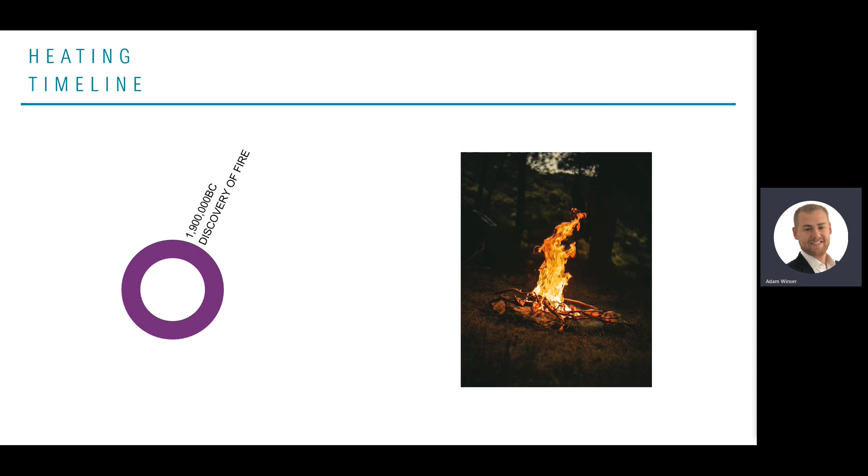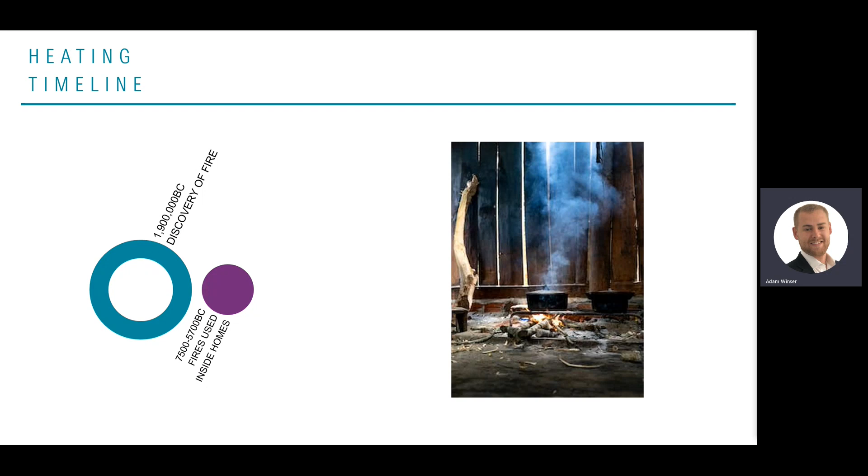Heating all started with the discovery of fire over 1.9 million years ago. It is then believed that fires moved indoors for heating between 7,500 to 5,700 BC. A major breakthrough in the timeline of heating was the concept of central heating, which is where one central heat source is able to heat an entire building. This concept is first believed to have been developed in ancient Korea and was later developed by the Romans.

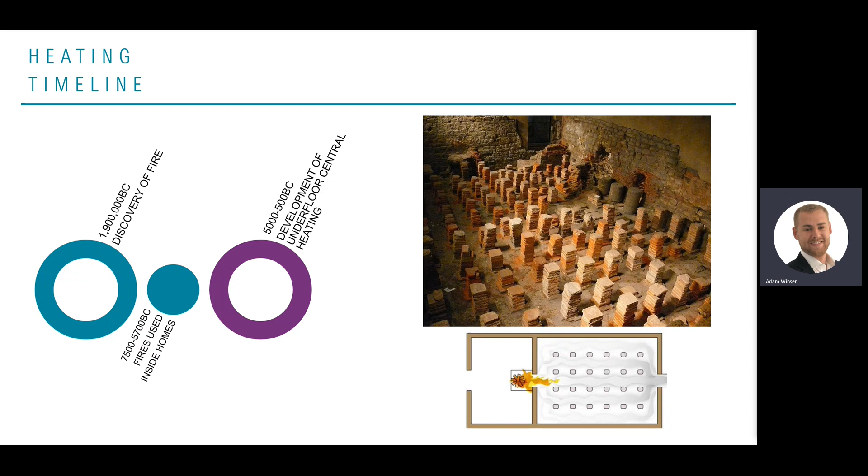As we can see here, the buildings were raised on plinths to allow for warm air from a fire to circulate under the building, heating the whole floor as a result. After the fall of the Roman Empire, very little development was made in heating. Central heating was practically forgotten and people returned to fires for heating.

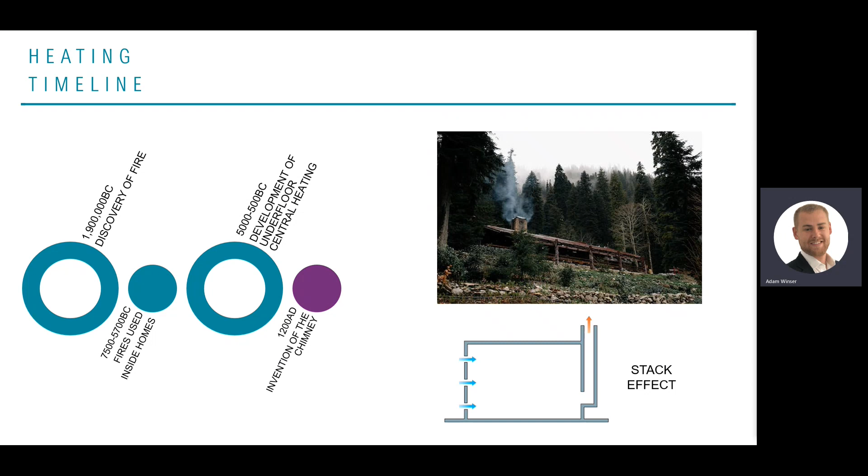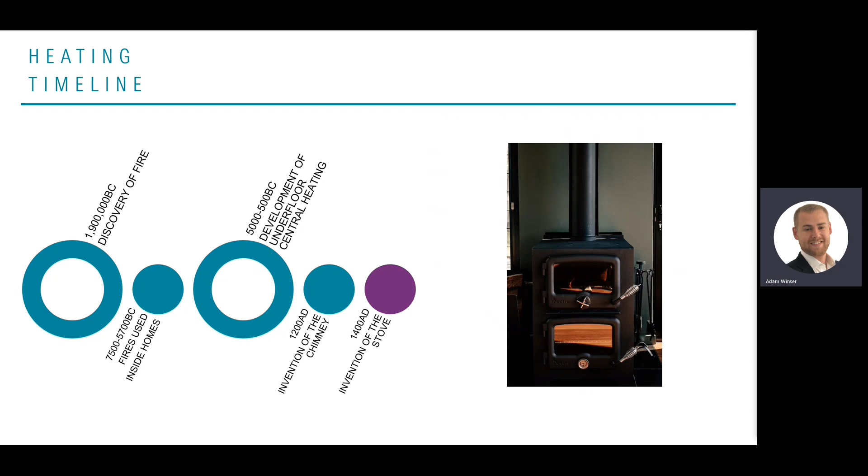In the year 1200, the chimney was invented, which now enabled smoke to be removed from properties, as well as improving the output of fires through a constant airflow known as the stack effect, which is continuously driven by buoyancy. Next came the invention of the stove approximately 200 years later, which improved the controllability of wood burning and allowed for heating to internal rooms away from the chimney.

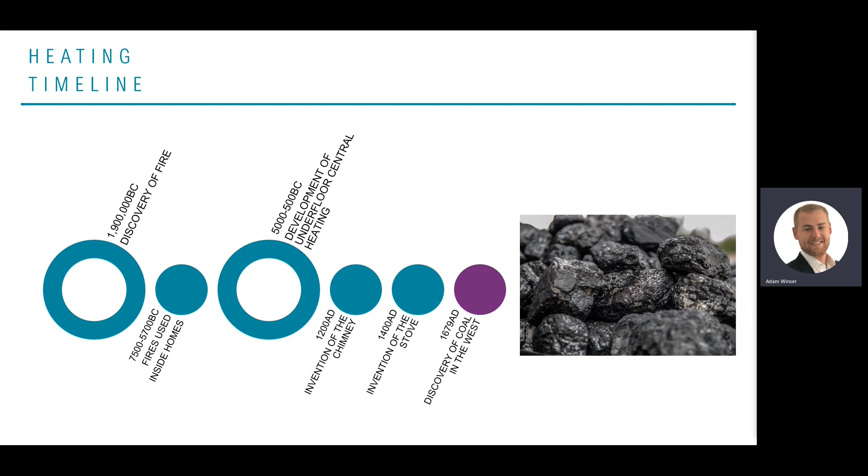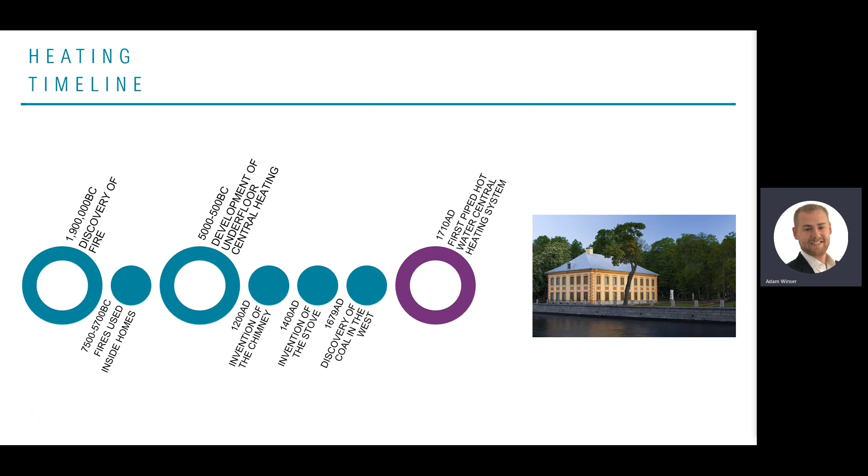Coal was discovered in the West in 1679, which offered a cheaper alternative to wood as a source of fuel. At the time, global warming was unknown, and therefore the severe consequences of burning coal were sadly not understood. The first water-based central heating system was installed in 1710 using an adjacent river. Central heating then developed further by the invention of a domestic steam boiler in 1790 that circulated hot steam around pipework.

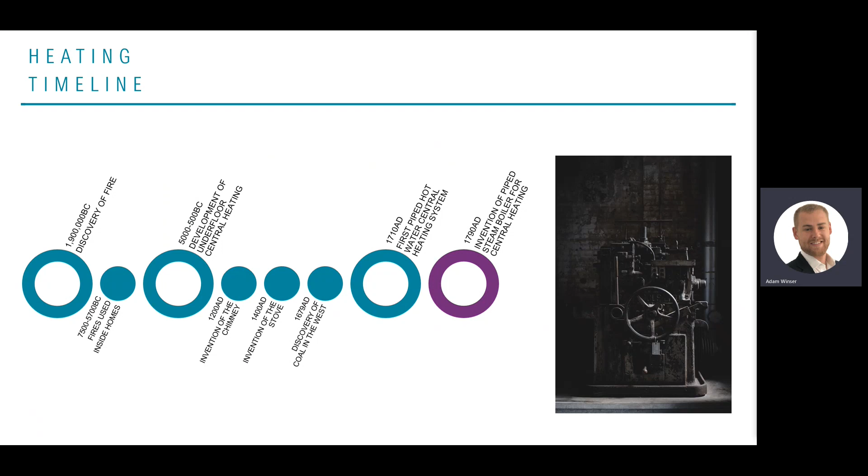Next came the development of the gas-fired stove in 1802 for both heating and cooking. This invention paved the way for gas to be used as the primary heating fuel, with over 80% of UK homes today running on gas.

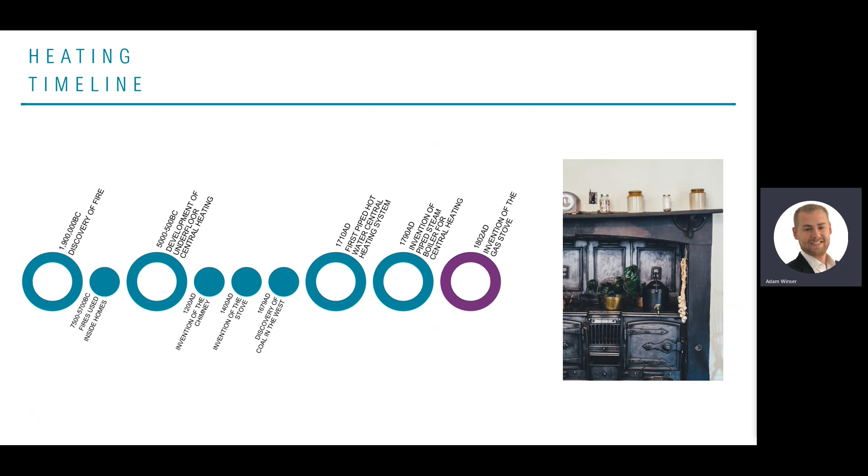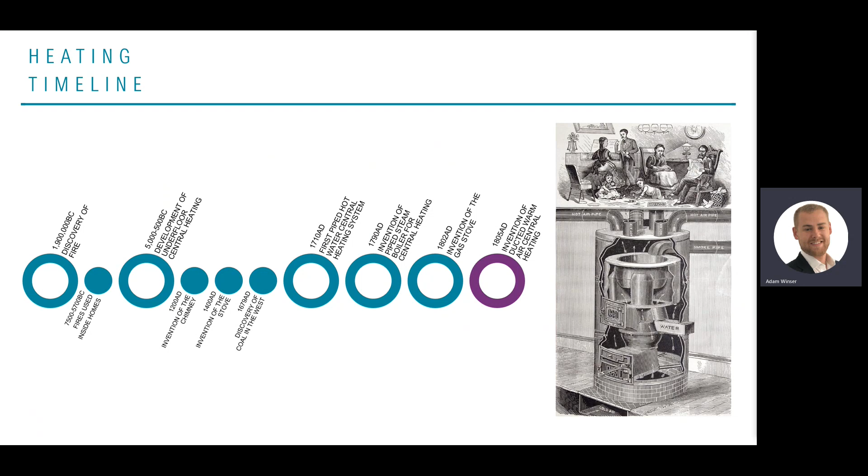In 1805, ducted warm air central heating was invented, which drew on the earlier concept of underfloor warm air heating. The addition of the ducts and floor grills allowed for warm air to be delivered directly into habitable spaces of a property, as opposed to the previous concept of having the warm air underneath the floor heating the entire floor, making this strategy more efficient. Warm air heating is still found today in some homes, most typically in the Midlands.

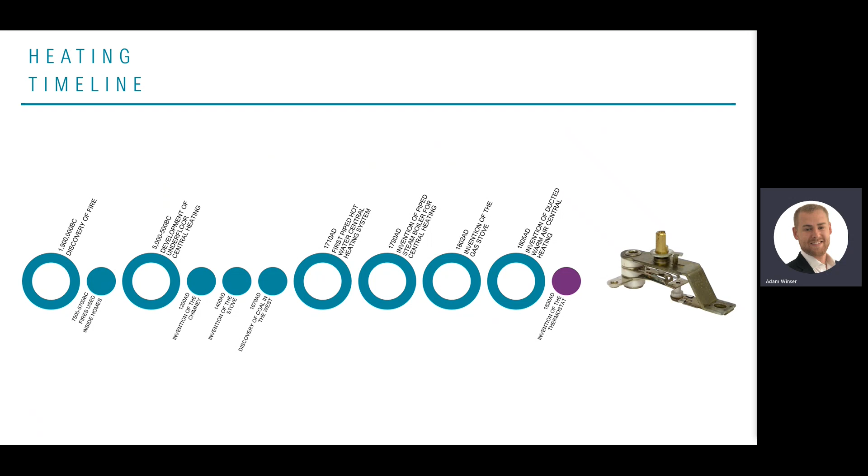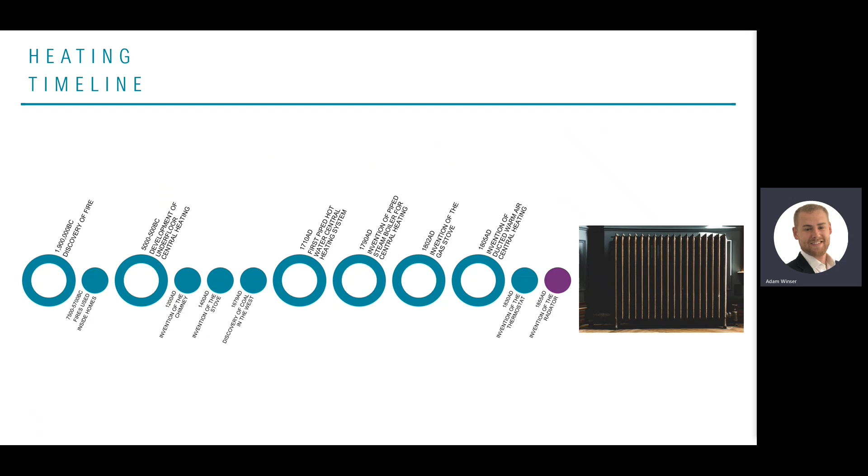The first thermostat was invented in 1830, which allowed for central heating systems to be automatically turned on and off to regulate temperatures. The radiator was invented in 1855, which is arguably one of the most important inventions in the history of heating. The radiator allowed for efficient heat transfer from water central heating pipework, which was not previously available, paving the way for the rapid growth in water-based central heating. Most of us today will have radiators in our homes.

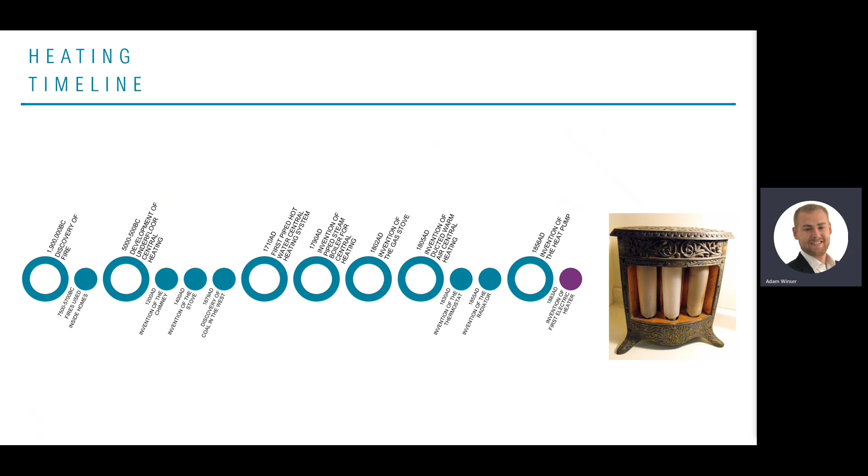The first direct electric heater was developed in 1883 using closely packed bulbs, which gave off heat as a byproduct of electrical resistance. Piped water underfloor heating was invented in 1905, offering an alternative and sometimes more effective solution than the radiator due to its ability to heat large surface areas at lower temperatures.

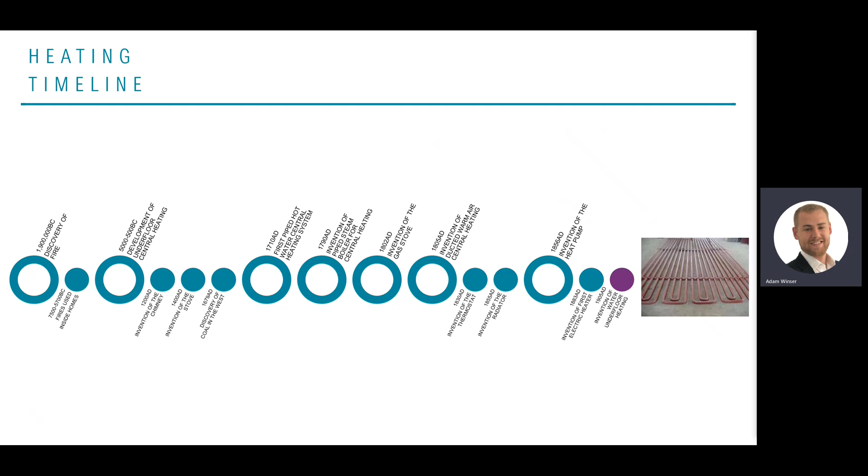So this is our simplified domestic heating timeline, meaning the majority of the systems typically found in homes today were actually first invented over 100 years ago. These have obviously been significantly developed and have become much more efficient over time.

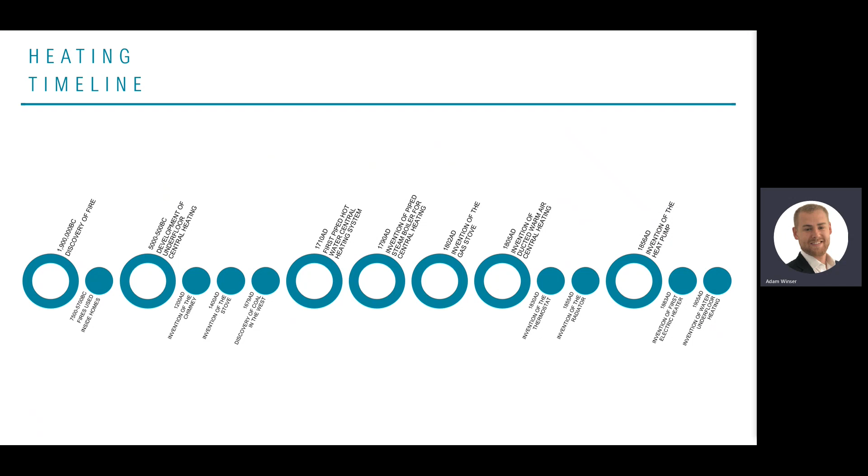So let's take a deeper look into central heating, and then we'll look at some of the domestic heating technologies available today. This graphic demonstrates the historic slow growth of the heating industry, the majority of UK homes not having a central heating system almost 7,000 years after the concept of central heating was developed.

Until 1970, central heating was regarded as something only for the upper classes and was too expensive for typical households, with most still relying on a single fireplace as a source of heat. With developments in manufacturing resulting in falling costs, central heating quickly became the norm, with 95% of homes run from central heating systems today. The main issue with the sudden rapid growth in central heating was that almost all installed systems were designed to operate by burning fossil fuels, such as gas and oil, which were much cheaper to run than electric solutions.

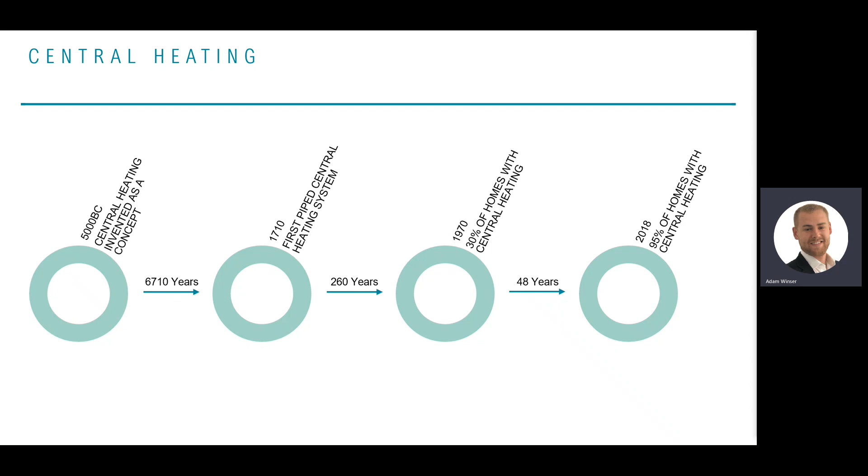So these are the most common heating solutions installed in the UK today, and almost all of you are likely to have one of these heating systems installed within your home. So firstly, we have the open fire, which is around 30% efficient. We then have a wood burner, 60 to 80% efficient. Warm air heating, 80 to 85% efficient. Gas stove, around 85% efficient.

Boiler, 85 to 100% efficient, depending on the fuel source. Electric radiator, 100%. Air source heat pump, 200 to 400%. And ground source heat pump, 300 to 500% efficient. As you can see, the heating efficiency, i.e. the useful conversion of energy input to heat output, varies significantly for the different systems, with heat pumps being by far the most energy efficient method of heating currently on the market.

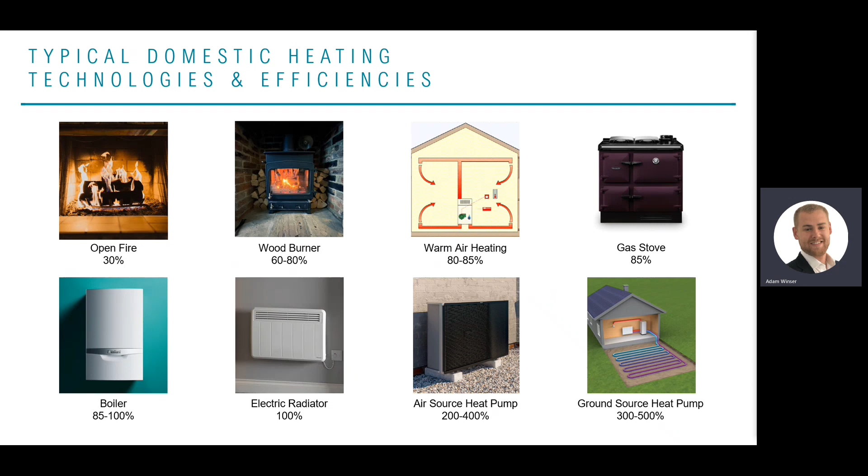To understand air source heat pumps, we first need to understand the relationship between air temperature and the efficiency of the system. As can be seen by the graphic on the left of the screen, the warmer the air temperature, the more efficient the heat pump is at converting electricity into heat. Please note that the efficiency values will vary between different heat pump models and manufacturers. This concept also explains why ground source heat pumps are even more efficient than air source heat pumps, as the temperature of the ground is fairly constant year round and is much higher than that of air during the peak winter heating period.

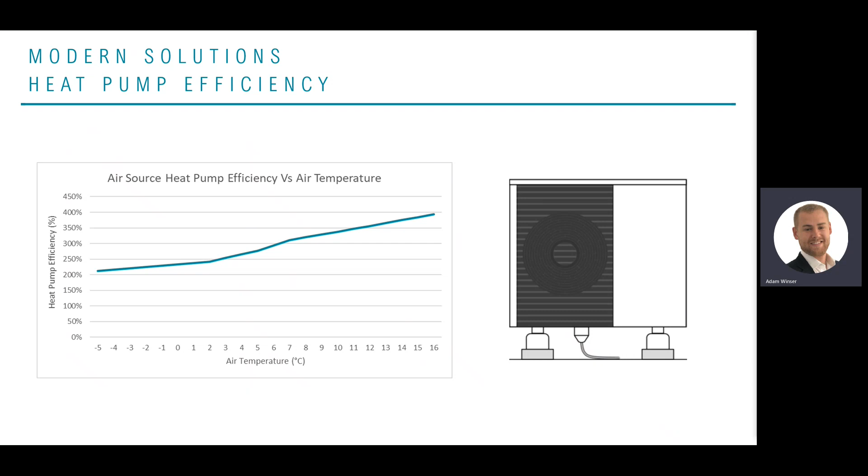So even though the concept of the heat pump was invented in 1856, development was slow due to the higher costs of electricity and significant investment into fossil fuel boilers dominating the market. It's important to note that during this time, even though the concept of global warming was not fully realised, the vast majority of electricity was generated by coal, which is considered as significantly more polluting than both oil and gas. Therefore, at the time, heat pumps were not the solution to combating global warming, even with their superior efficiencies.

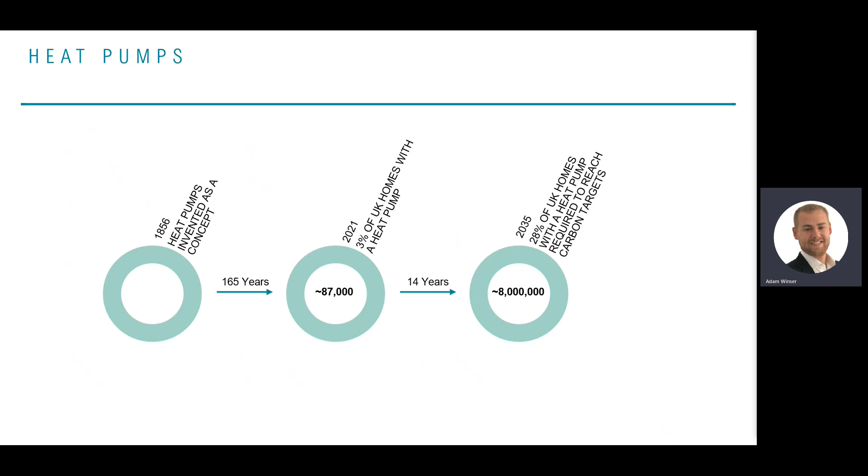To reach the carbon target set out by the UK government, almost 100 times the number of domestic heat pumps installed in the last 170 years will be required to be installed within a 14-year period. This means 600,000 heat pumps will need to be installed per year until 2035, which involves huge investment and upskilling of the industry. So, why the current drive towards heat pumps and electricity? To understand why, we need to take a look at grid electricity.

Historic grid electricity was generated by burning coal and other fossil fuels such as gas and oil, emitting high levels of CO2 into the atmosphere. And the electricity grid today is made up of a number of sustainable and renewable sources, such as nuclear, hydropower, solar, and wind, alongside the existing fossil fuels, resulting in reduced carbon intensity for the grid.

This diagram shows the typical split of fuel source for the UK electricity grid. We can see that natural gas still holds the greatest share in the grid, but is now only slightly higher than renewables, which will soon overtake. The phasing out of coal and oil has accelerated over the last 50 years, with 88% of UK electricity generated by these two fuel sources alone in 1971. They now account for less than 5%, and coal will be phased out completely in 2024.

The carbon conversion factors for the primary fuels in the UK grid are displayed to the right of the screen, which provide the amount of carbon emitted per unit of energy delivered. The combination of fuels used today results in a grid carbon factor of around 0.19 kilograms of CO2 per kilowatt hour, which is set to be reduced to around 0 kilograms of CO2 per kilowatt hour by 2035 through the introduction of more renewables and nuclear energy.

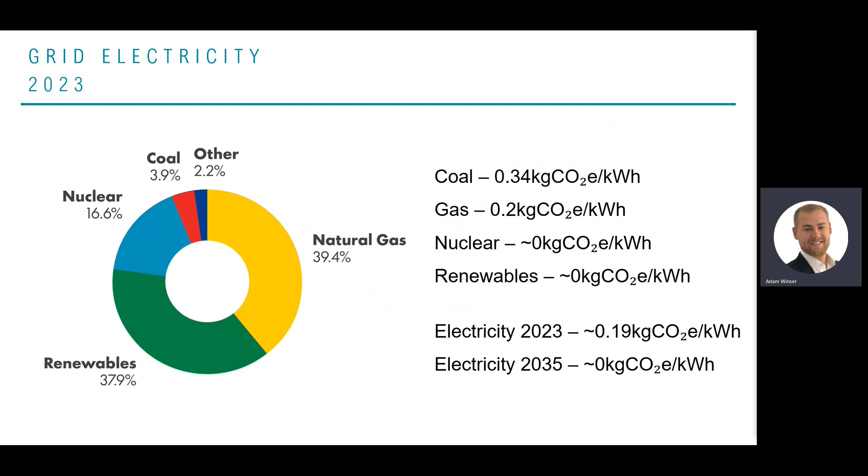So, what are the modern solutions today powering our homes alongside heat pumps, which we've already discussed? The following video provides an insight into home solutions available today.

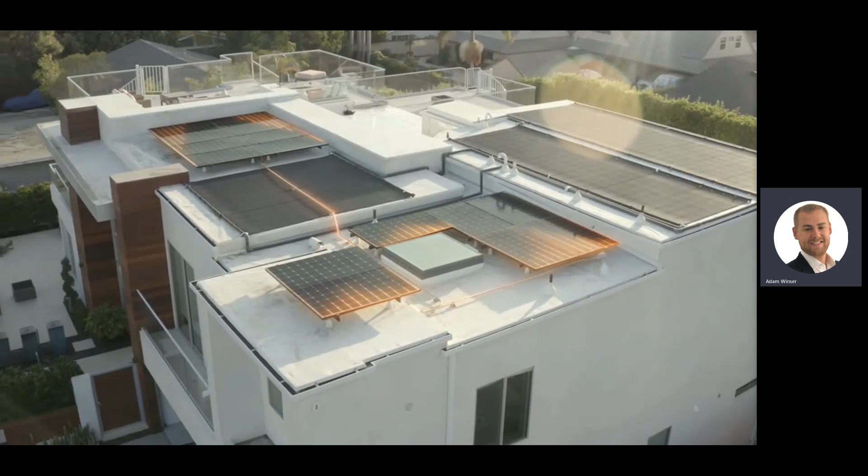Nature elegantly converts the sun's energy from one form to another. These energy transformations happen around us every day in our cities, homes, and cars. But unlike in nature, we need to convert solar power with an inverter. These inverters turn solar energy into home electricity, convert power into hot water, cool and heat up our homes and buildings with HVAC systems, store solar energy in a battery to use in the evening, and even charge our electric cars.

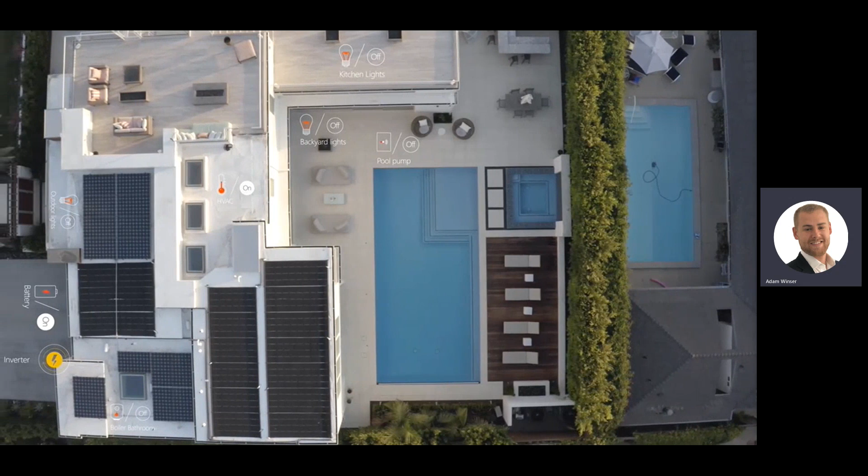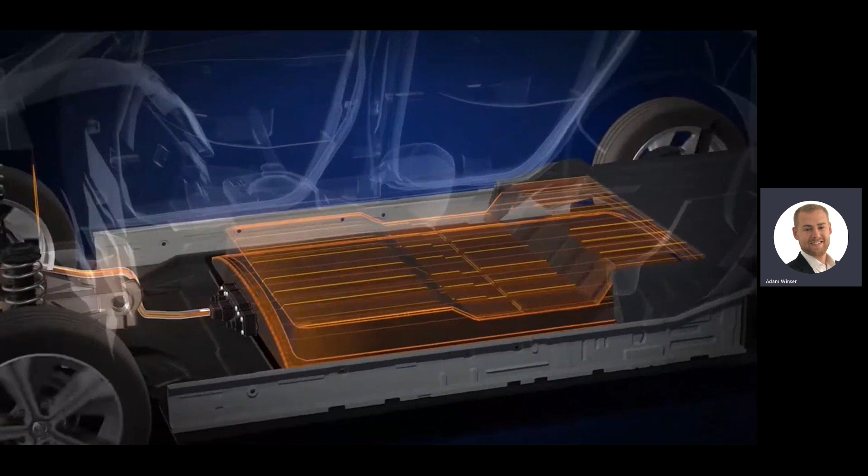Inverters are turning our homes and businesses into smart energy ecosystems. One smart inverter can manage all of the home's energy needs. But inverters do more than just managing our home's energy. They convert and manage energy in our electric vehicles, office buildings, factories, data centers, and more. Since these inverters are all around us, they can work together in a network to smartly manage energy.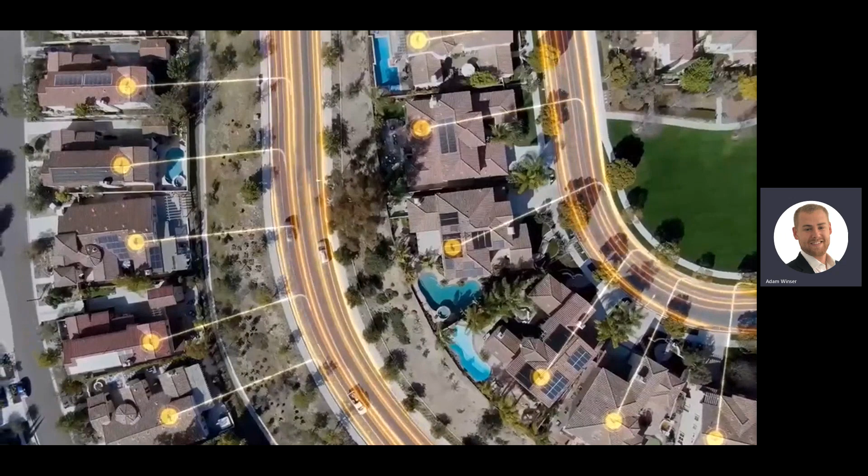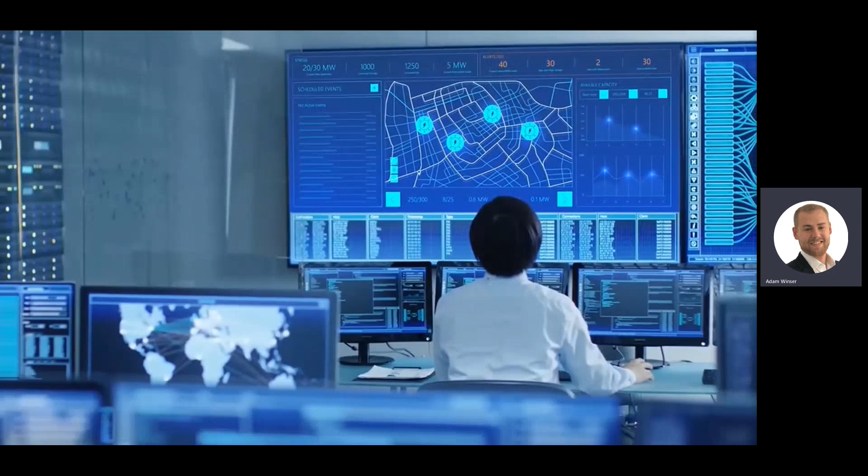They transform our PV systems, batteries, and other appliances into energy resources for the grid, turning each of us into active energy participants and producers. This will revolutionize the grid into a decentralized energy network and power our world based on a new clean energy economy. By improving the way we use and consume energy, SolarEdge is powering a better future for us all.

So that video demonstrated how solar panels can be used towards powering our homes with clean renewable energy, and we'll expand on that in the next couple of slides. This graphic displays a typical operation of a domestic solar panel installation with battery storage on a peak summer day in the UK.

The green curve demonstrates the amount of solar energy generated. The red curve shows electricity purchased from the grid. The darker blue curve shows the direct solar energy consumed, and the transparent blue curve shows the consumed electricity from the battery storage system, whilst the orange curve shows solar electricity exported back to the grid. The spikes in the morning and evening for the electricity consumption reflect typical morning and evening activities, such as putting the kettle on or cooking.

So here we can see that around 5:30 a.m. the solar electricity generated is greater than the electrical demand. So at this point, all electricity consumed is now from the solar, which is both free and renewable. Here, electricity is sold back to the grid at 15 pence per kilowatt hour, as enough solar electricity has been generated to fill the battery, whilst also meeting the electricity demand.

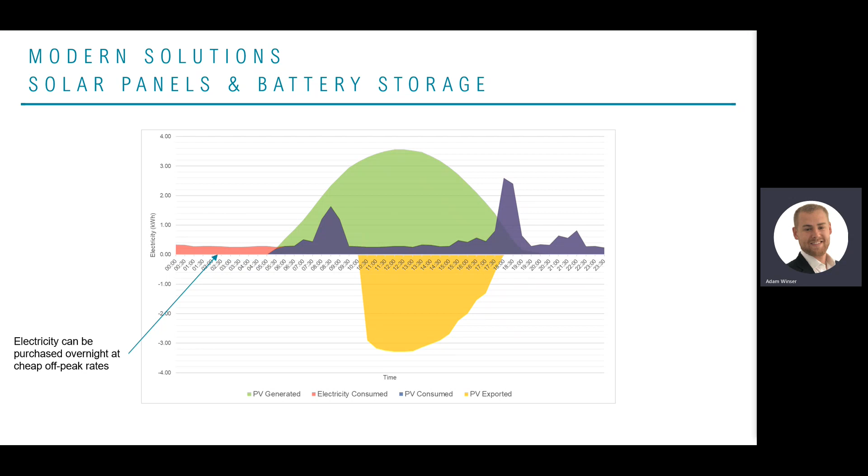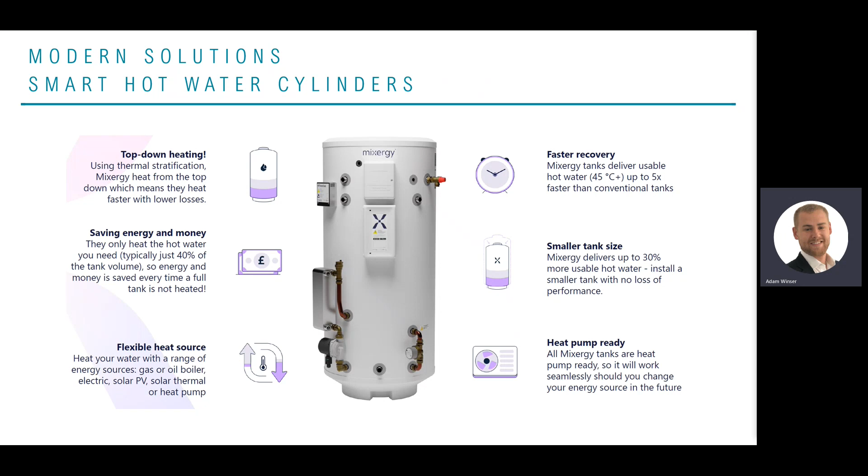We can further increase our energy efficiency of hot water via smart hot water cylinders, such as the Mixergy cylinder shown. Compared to a conventional tank, this cylinder is capable of heating our hot water up to 5 times faster. It can deliver up to 30% more hot water, allowing for a smaller tank to be installed, and it can provide a reduction in energy of typically between 20 to 40%, saving both carbon and cost. So, how does it work?

The cylinder shown on the left is a traditional hot water cylinder. Cold water is fed into the base of the cylinder, which is then heated via heat exchange between an indirect coil filled with hot water from a heat source such as a boiler, or via a direct electric immersion heater. The hot water tank is controlled via basic time controls, which simply turn the heat source on or off to heat the whole tank of water.

The cylinder on the right is the smart hot water cylinder, which has the same heating elements as the conventional cylinder. However, they are located at the top of the cylinder. Rather than pumping cold water into the bottom of the tank, the cold water is pumped to the top of the cylinder and is sprayed in via a nozzle to allow for diffusion. The spray nozzle and top-down heating approach allows for us to choose exactly how much water we would like heated within our tank. The amount of hot water can either be controlled via an app or can be calculated from machine learning to develop an optimized weekly schedule based on our personalized hot water usage.

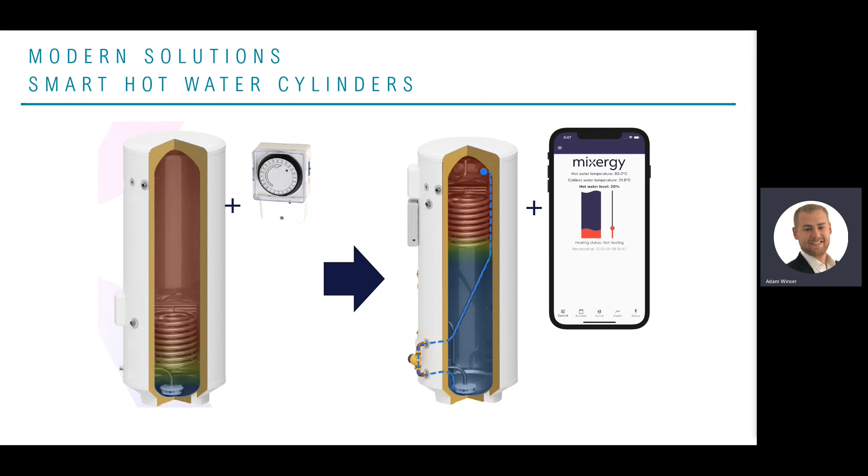The effect of the smart cylinder approach to heating the hot water cylinder is demonstrated by the top row of the graphic shown on screen.

In the image, we can clearly see the thermal stratification occurring, which allows for the control of how much hot water we would like to heat, whilst providing us with more hot water in a shorter space of time.

The bottom graphic for the conventional cylinder shows how adding the cold water in at the base of the cylinder results in dilution of the hot water, taking longer for the tank to heat up whilst consuming more energy.

These smart hot water cylinders can also work as thermal stores, taking excess electricity from the grid and storing them in our cylinders for free, creating a similar decentralized heat network to the battery solution we saw before.

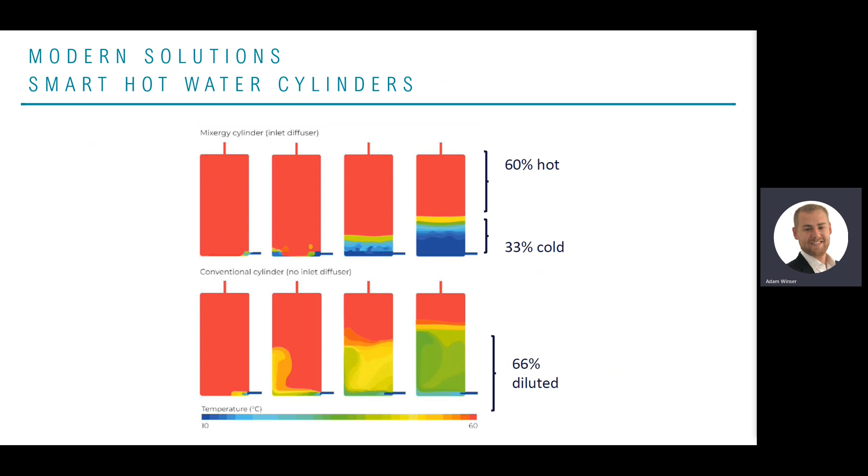So that was just a brief overview of a small number of the innovative products available. If you're interested in finding out more on modern solutions to home energy, then check out the Fully Charged show on YouTube and watch any of the videos in the Clean Energy playlist.

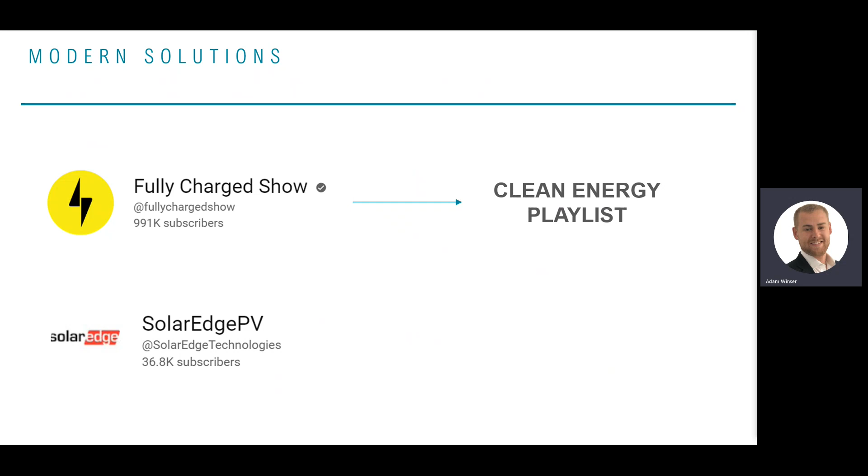So that was an overview of the development of engineering technologies, and hopefully you can see that what was historically a slow-growing industry has taken off over the last 50 years and is growing at an exponential rate, making now a very exciting time to be within the building services industry.

Now we have a few multiple choice quiz questions to test your knowledge of what we learned in this presentation.

Question 1. What was the first source of central heating? Was it A, fireplace, B, stove, C, underfloor water, or D, underfloor air?

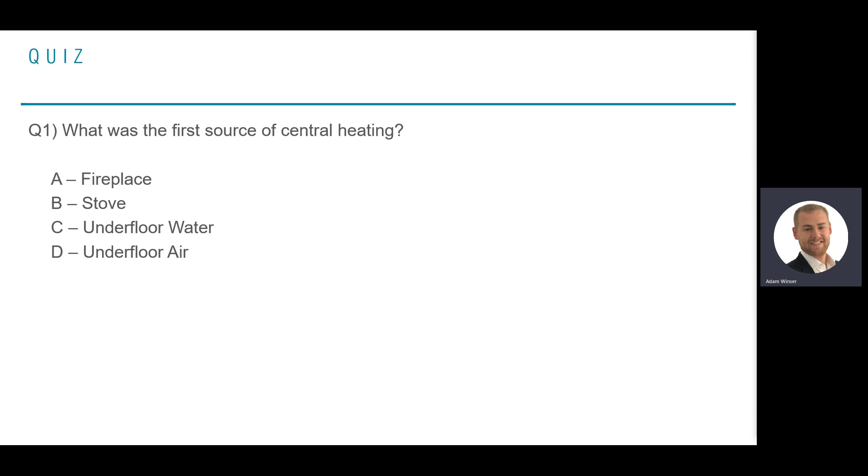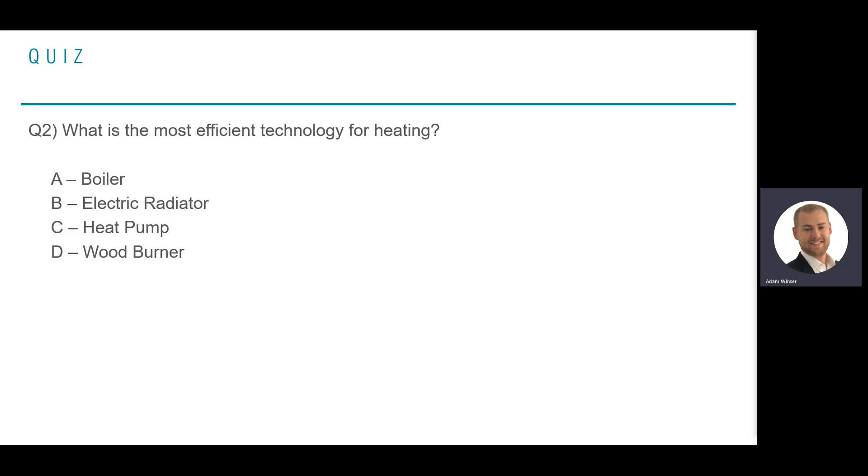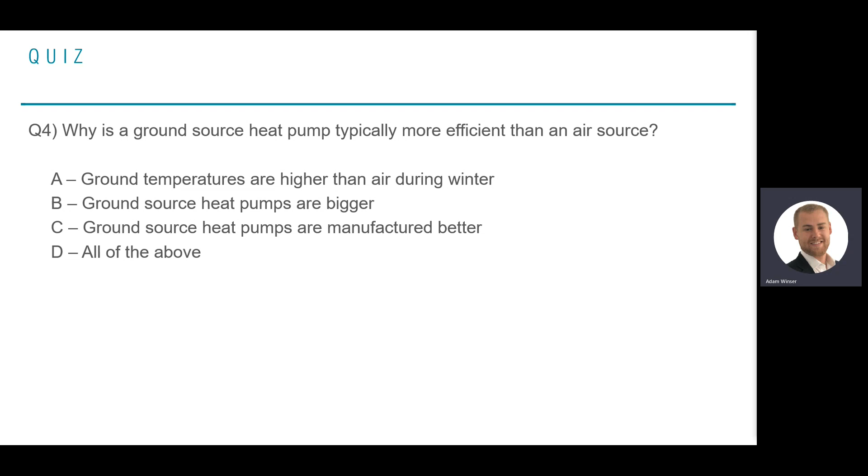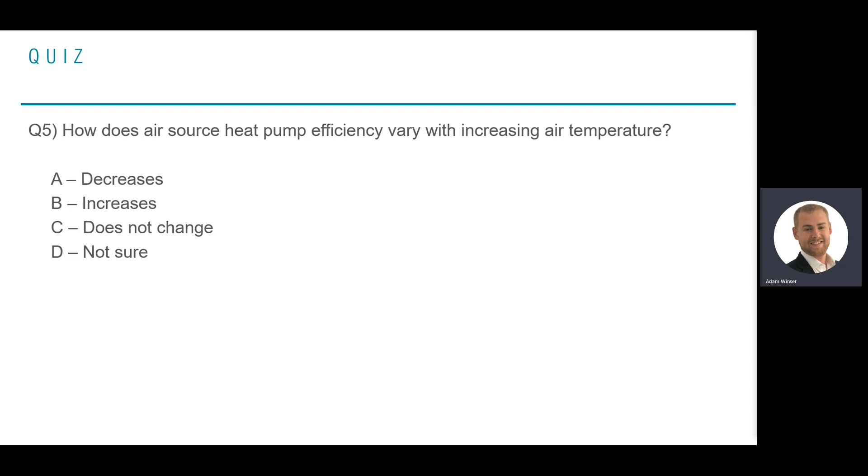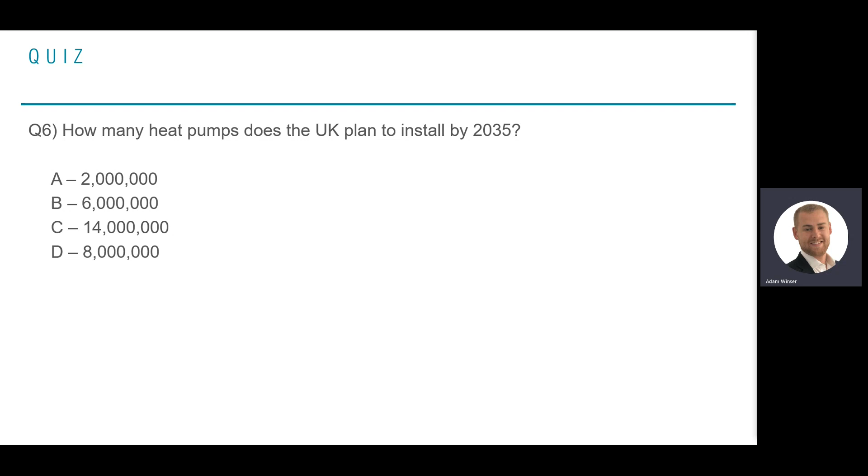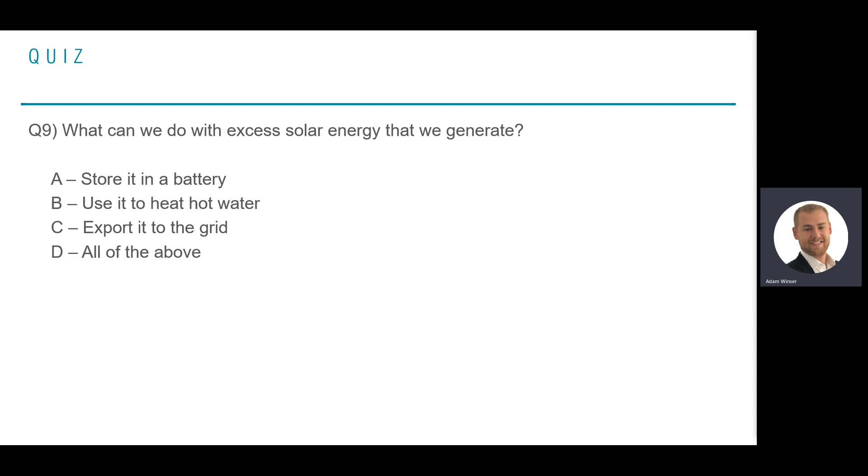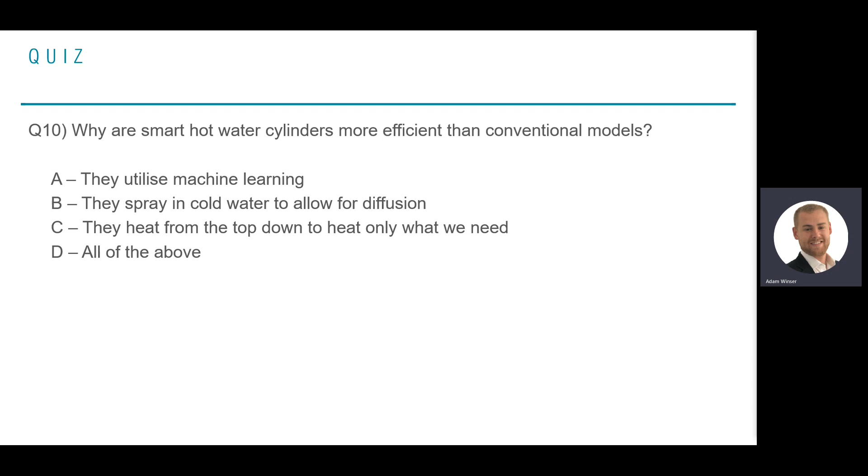Okay, so now we'll have the answers. So firstly, question 1 is D, underfloor air. Question 2, C, heat pump. Question 3, B, 200 to 400%. Question 4, A, ground temperatures are higher than air during winter.

Question 5, B, increases. Question 6, D, 8 million. Question 7, A, natural gas. Question 8, D, all of the above. Question 9, D, all of the above. And finally, question 10, also D, all of the above.